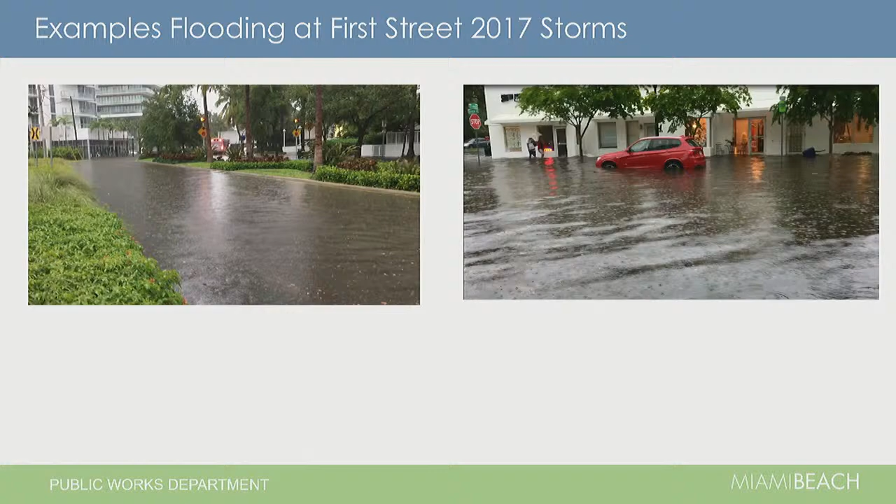Now, if you would, if you can load up the presentation, please. Thank you. So with that, committee members, I'm going to go through a brief presentation. Talk about the timeline, the optimized design, and the MOT associated with the project, the 96-inch trunk line alternatives that we've looked at the request of the community, and also to make sure that the optimum location was selected. Other community concerns, green space, trees, the pruning, we'll talk about that, and then our conclusions and next steps.

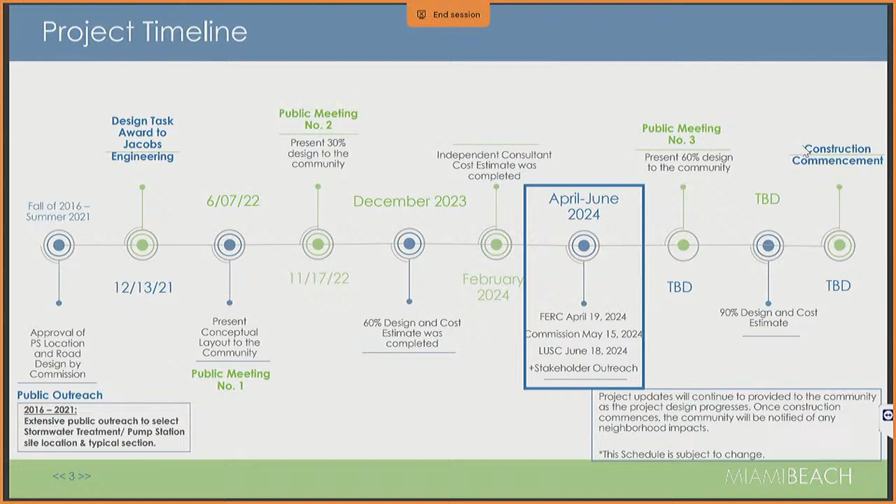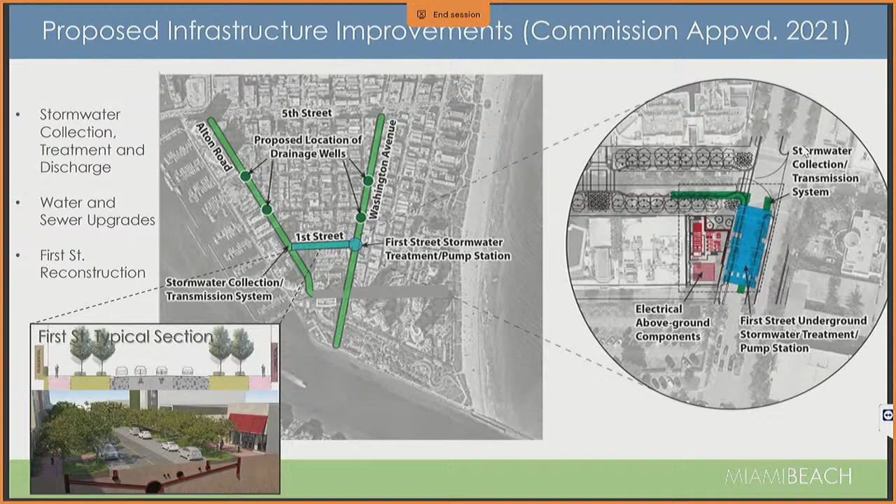So in 2021, just as a reminder, the commission approved the First Street project. Just as a refresher, this project is to be able to provide drainage for the entire south of Fifth neighborhood. It's a neighborhood improvement project. The reason we're segmenting it is at the request of the community, and also to be able to manage the construction better and to minimize the impact to the public. But it's important to note that this project and all its components are for the entire south of Fifth neighborhood, including the pump station that's located south of First Street on Washington Avenue.

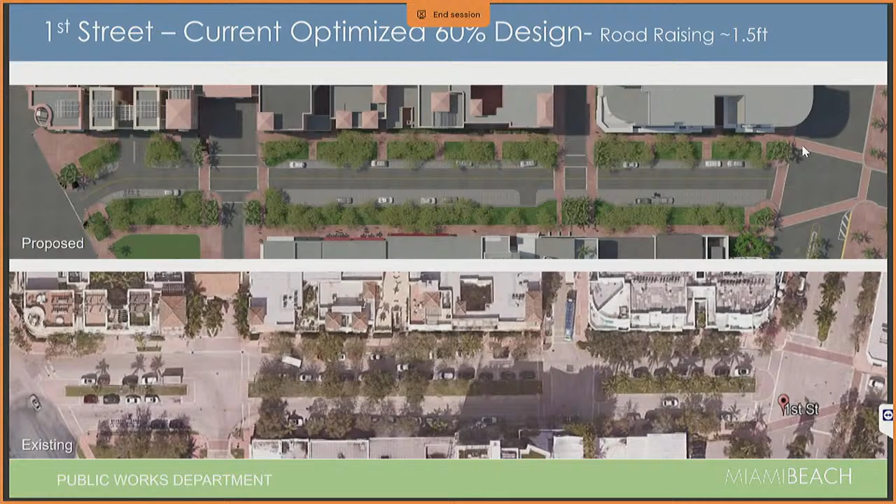Where's the water going? So the two strips you see, the one on the bottom represents the existing condition today on First Street, and the top is the optimized version with the landscaping, the wide green areas on both sides, the 2 lanes, 1 wide lane on the business side for valet purposes, as well as parking on the other side. And as you can see, it's 2 lanes of traffic, 1 in each direction.

In terms of construction phasing, and as a reminder, we stopped the design at 60%. The reason for that was there were questions about the construction costs. We engaged an independent consultant to do not only a verification of the construction cost estimate, but also to come up with a potential constructability and phasing plan. As a result of that, we were able to segment the project into 4 distinct phases. Phases 1 and 2 have to be done together. Why? Because phase 1 is the pump station and the outfall.

The pump station and the outfall do nothing without having the trunk line connected. So phase 2, which is the trunk line on First Street, is critical to the project. It also provides the enhancement and beautification to First Street.

Phases 3 and 4 are grayed out because those are not being considered at this time. But they're important because they feed into the system and collect everything south of the Fifth neighborhood.

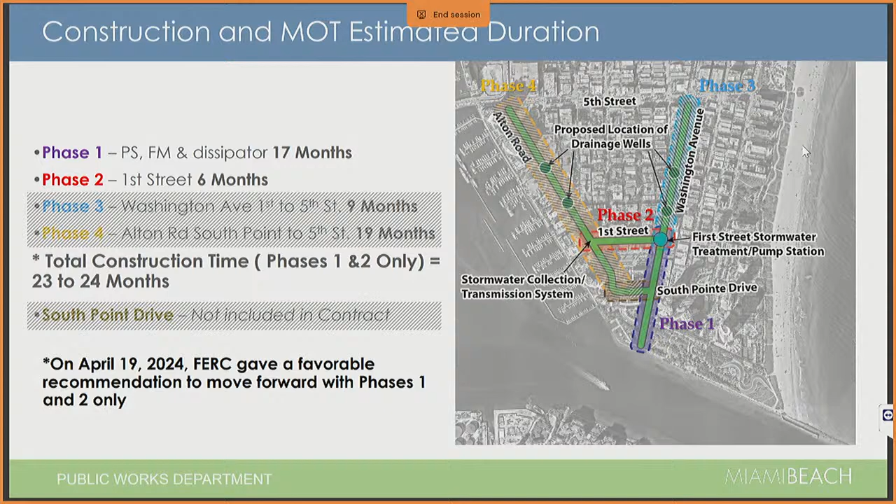Total construction time for phases 1 and 2 is about 24 months. As a reminder, on April 19th we went to the FERC committee, and the FERC gave it a favorable recommendation to move forward with phases 1 and 2.

So in terms of construction, how we would phase the project.

The first phase, what we call phase 1A, would be construction of the pump station, located just south of First Street on Washington Avenue. That pump station is the linchpin of the entire project, so it has to be built first.

That would require closure of the intersection of Washington Avenue to construct the pump station. We would have a comprehensive MOT to route traffic and keep it going. Once that's completed...

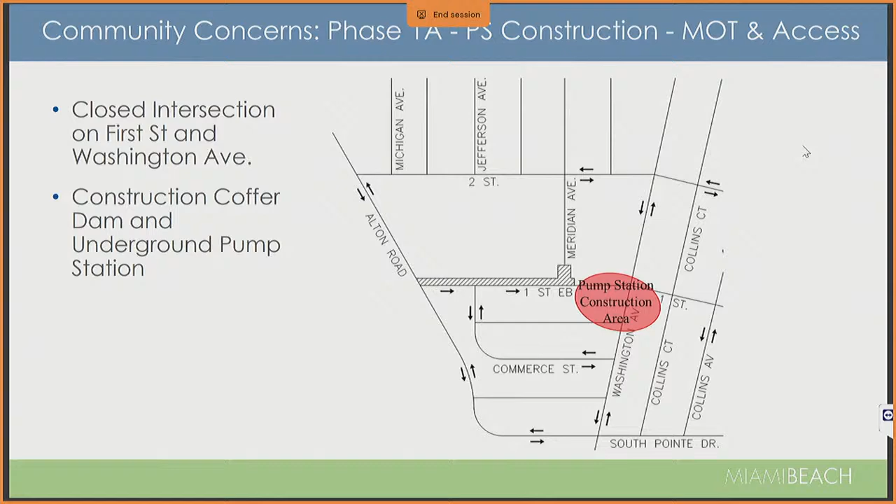Then we would go to phase 1B. Phase 1B is constructing the outfall that connects the pump station through South Pointe Park and out into the bay. This is the only part of the project that is pressurized.

This is a force main that will be connected to the pump station. Once the pump station receives all the water from the system, it'll be pressurized and move through and out into the bay, going through a series of treatment boxes and an energy dissipator to slow down the water as it makes its way out.

The injection wells on Washington and Alton are part of phase 3 and 4, for water quality purposes.

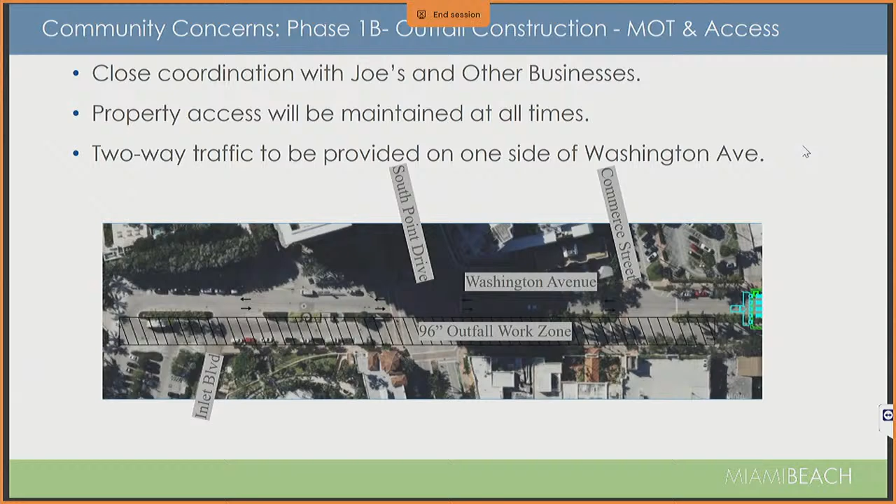Then we would start construction on First Street. What we've been able to accomplish, after meeting with the community and their concerns, is to shift the 96-inch pipe closer to the residential area so that we're able to keep a work zone of 60 feet.

We need that work zone of 60 feet because the pipe itself is an 8-foot diameter pipe. With that, the trench requires a 16-foot trench box. But it's not only that—it's the machine required to excavate and load onto the trucks, and then eventually the pipes are brought in.

These are massive 8-foot diameter concrete pipes that have to be brought in by crane and put in place. On the business side, we would have eastbound traffic with two travel lanes: one an 11-foot parking valet lane, and the other the through lane. So during construction of First Street proper, we would only have traffic in the eastbound direction.

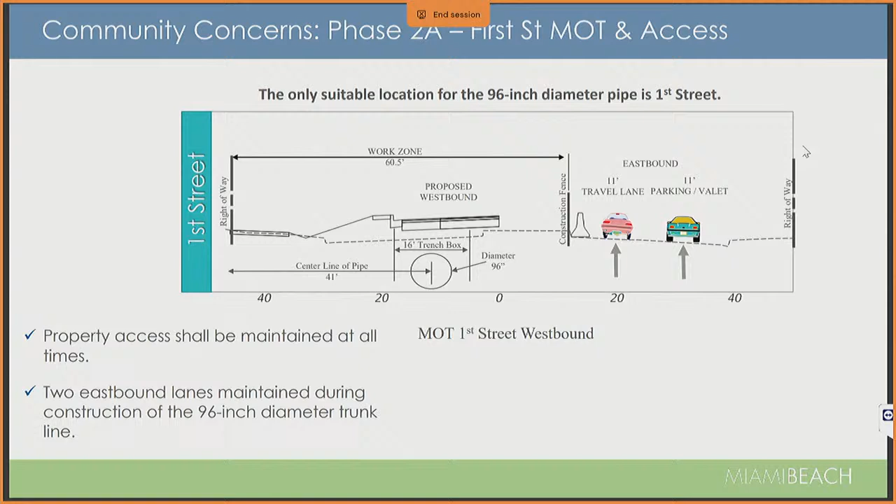That would be phase 2A. We were asked to look at why not Second Street, why not Commerce Street, why not other options. So we did a detailed analysis.

In this diagram, on top is the same section I just showed you in the previous slide, which is First Street proper. Below it, with the blue line, is the typical section for Second Street. Second Street is a 50-foot right-of-way, so essentially we would be occupying the entire street in order to put that 96-inch pipe.

Another point that makes it unavailable is that there's a major FPL duct bank right through there. As you can see, that yellow box is encroaching on the circular pipe and would have to be relocated. That's a huge undertaking which would be disruptive to the community.

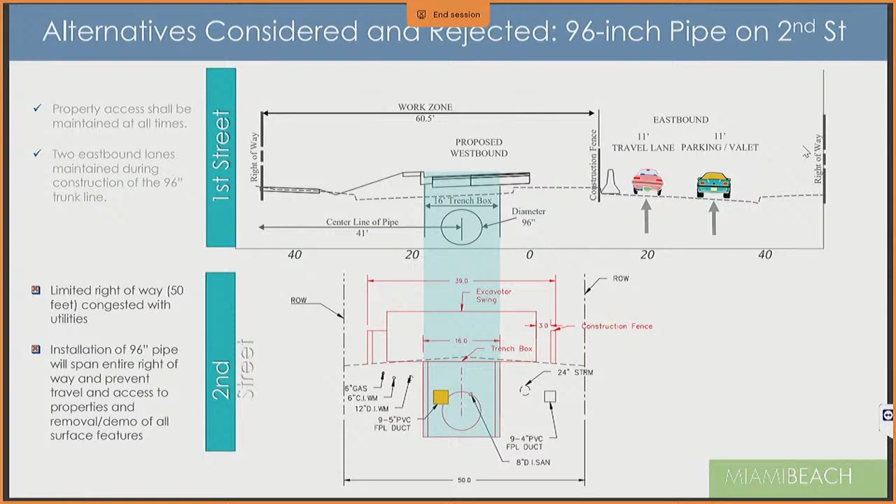We were then asked, why not Commerce Street? Commerce Street has one of the most important pieces of infrastructure in the city: a 60-inch force main that comes down and connects to our 54-inch force main. This 54-inch force main eventually takes all the sanitary sewer flows from the entire city.

And from our three sister cities to the north, feeding it under Government Cut to the central wastewater treatment plant at Virginia Key. In order to fit a 96-inch pipe, we would have to do a massive relocation of this sanitary sewer force main. That's also a huge disruption to the community, not to mention a huge cost.

I should also remind you that the 54-inch force main is relatively new infrastructure, placed within the last 10 years—I believe it was constructed in 2014. It would also require relocation of the pump station further on Washington Avenue, which would essentially lay in front of the restaurants on Washington Avenue, which would be extremely disruptive.

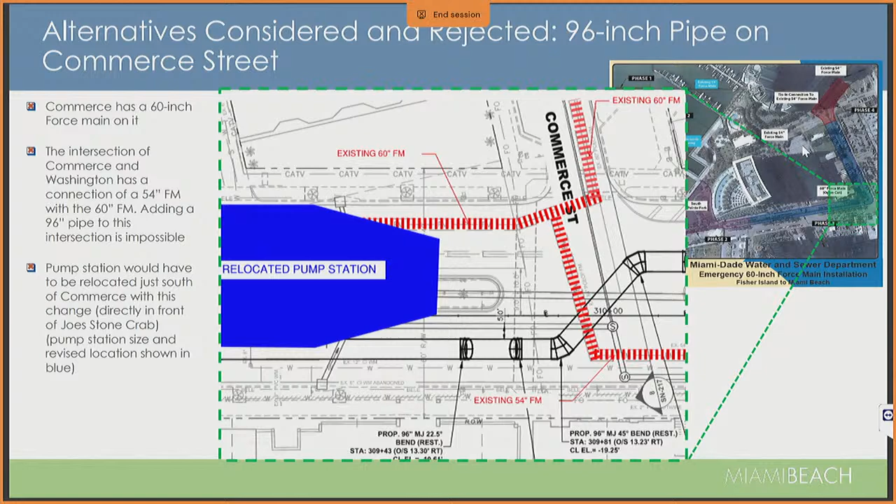We were also asked to look at smaller diameter pipes. When you put smaller pipes that are required to hold that kind of volume, eventually the trench becomes much bigger. You're occupying a much bigger area. It's just impractical, plus the hydraulics of that are significant.

Horizontal directional drill is great when you have a pressurized system, because in order to put a tunnel, which is what a horizontal directional drill is, you have to go in a parabolic shape. A gravity system, which is all of the system for First Street, with the exception of the force main that goes out to South Pointe Park and into the bay, all of that is gravity. So what happens when you put a gravity system in a parabolic shape, it becomes like a siphon. You would have to have an incredible number of feet of head to push that water through. You just can't use it for gravity systems.

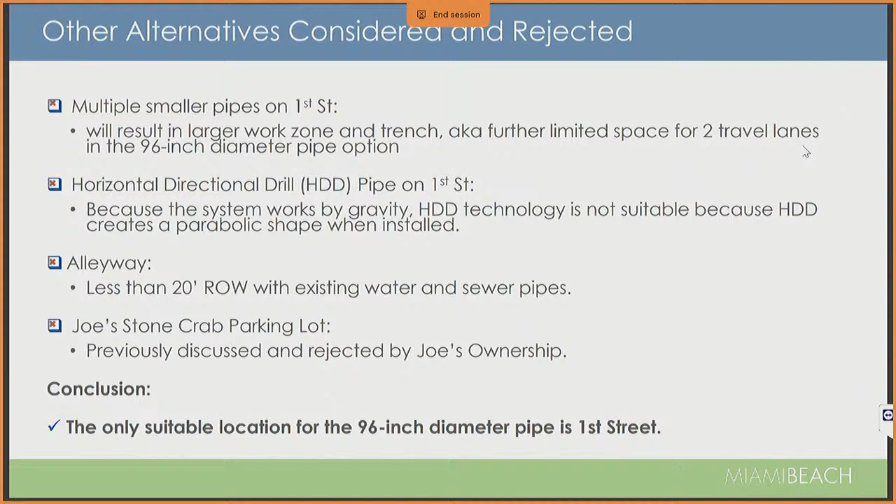We were then asked to look at the alleyway. The alleyway is less than 20 feet, you can't fit this massive construction into it. We were also asked to look at Joe's Stone Crab parking lot, and I've approached Joe's Stone Crab, and the ownership has said they're not interested in us occupying their private property. In conclusion, and this has been exhaustively looked at, the only suitable location is where we propose it, on First Street.

In terms of the relocation of the trees, one of the major concerns addressed was the issue of oak trees - the beautiful oak trees, we all agree they're beautiful. We've made a commitment that in order to preserve the character of First Street, we're going to root prune these trees. They would probably be root pruned 3 to 4 months in advance, slightly trim them, have them relocated. We were looking at spaces within - now we'll go on to the next slide.

One of the potential areas is our green space facility, to look at placing these trees so that we can maintain them during the construction and then bring them back. There may be some that do not survive, they go into shock. The commitment we've made is that we will replace those oak trees with 10-inch caliper oak trees. A 10-inch caliper oak tree is a pretty sizable tree, and a lot of the calipers of the trees are less than 10 inches on First Street.

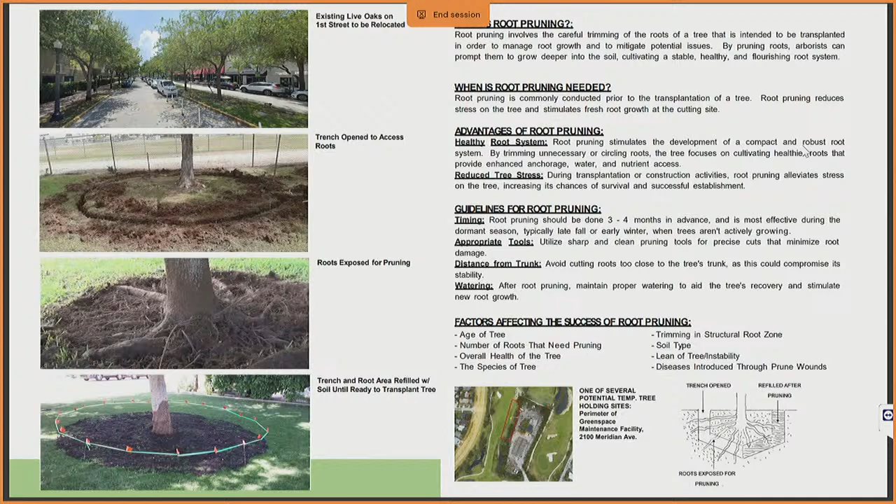So we've made a commitment that we're going to end up with 118 trees along First Street. We're also going to plant them in the green areas, typically on both sides, in a triangular pattern so that you start developing that canopy. We worked very closely with our landscape architect in-house, our Assistant Director of Public Works, Rodney Knowles, as well as with the consultant.

In terms of parking, the proposal - the 60% plans - have parallel parking on both sides. It has the wide valet lane on the business side, and on the residential side, the single parking lane. We had been asked to look at another concept to try to maximize, or minimize the loss of parking. We did look at a diagonal parking configuration.

So in terms of parking, under the current configuration, we end up with 36 active parking spaces, plus we would reconfigure Jefferson Avenue with 12 spaces, giving us a total of 48 spaces. Those parking spaces would all be available for residential parking - residential zone 2, which is currently what you have out at First Street - and that would be made available to the residents.

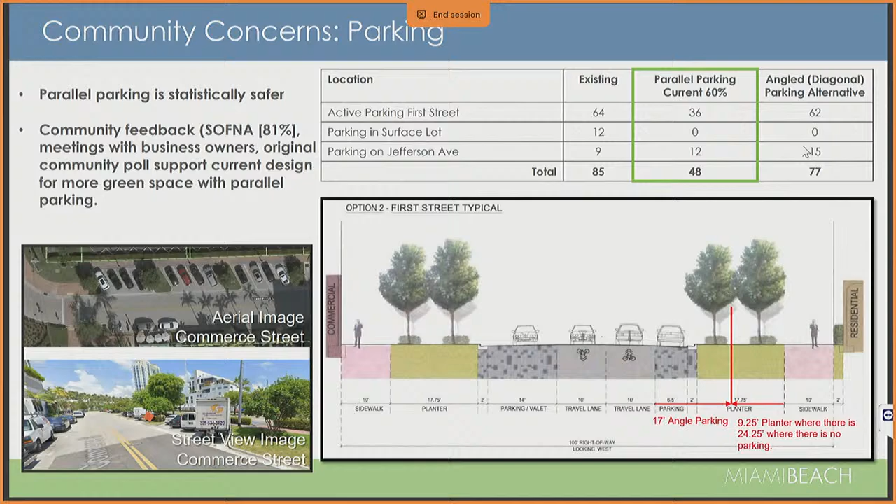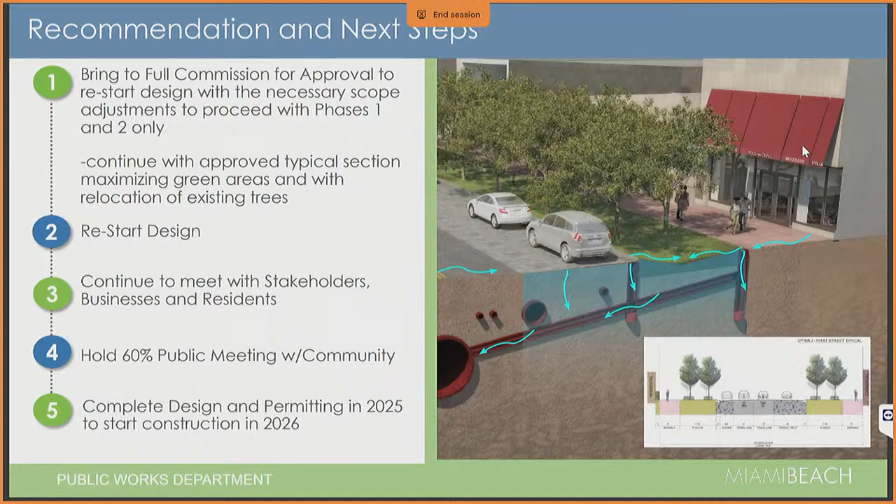Before we open up the floor to discussion, the most important thing today is for us to agree whether we want to move forward with the First Street project. After that, we can talk about pipe location, pump station, trees, parking, travel lanes, everything else falls after that. But before we get into that discussion, all of that is moot unless we agree that this is an important project to move forward with. So before we proceed with the agenda, do we all agree that the First Street project and these two phases are phases we want to proceed with? Okay, with that, I see by acclamation. Let the record reflect that by acclamation, this committee believes we need to proceed with the First Street project.

With that, let's open up the discussion to the location of the pipe and pump station. Is there discussion from the dais, questions from the dais? The administration is recommending placement of this 96-inch pipe along First Street, shifting it as far north as possible, and maintaining the pump station at the proposed location at the parking lot of the corner of Washington Avenue and First Street. Is there discussion, questions, or comments from the dais on the staff recommendation as to the location?